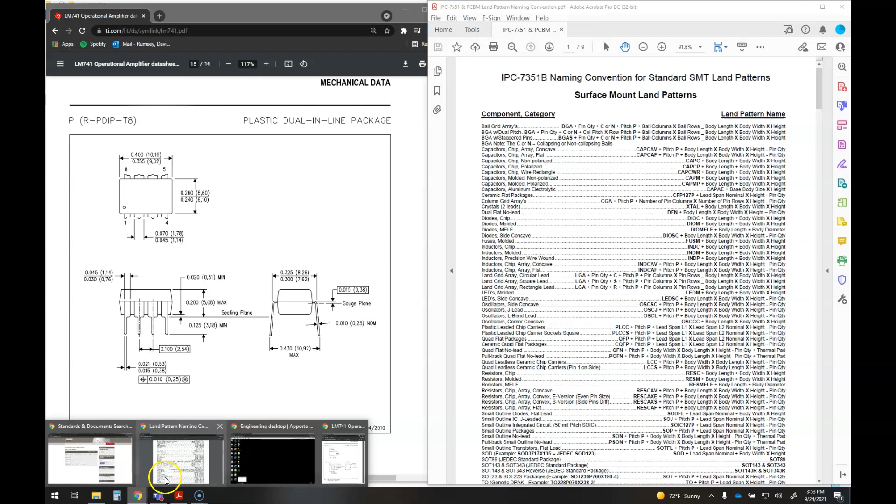Now what I'm going to do here for this particular one is I am actually going to use the Apporto system to show you how to be able to upload things and to set things up for doing this here. So first off, I have Apporto open. I went ahead and launched Allegro, which you can just do OrCAD and Allegro products, and then the PCB editor's right there. Now, I also have launched the pad stack editor, which is not the most obvious way to find it in Apporto. Let me close that here.

If you try and search through these, you're not going to find the pad stack editor searching through these. If you click the start menu and try and search, there's nothing there at all. But if you click that start menu and you just type in pad stack, you can see pad stack editor, and it says desktop app, which to me means it's somewhere on the desktop, but I have yet to find where the link is. If someone finds where that link is, more money to you. So let me move that to trash bin here. All right, but it's open.

Now the reason I point that out is that if I'm going to make a footprint on Apporto and I haven't saved my pad stacks to Apporto, I'm going to have a problem because I need to have both my pad stacks and my footprints there.

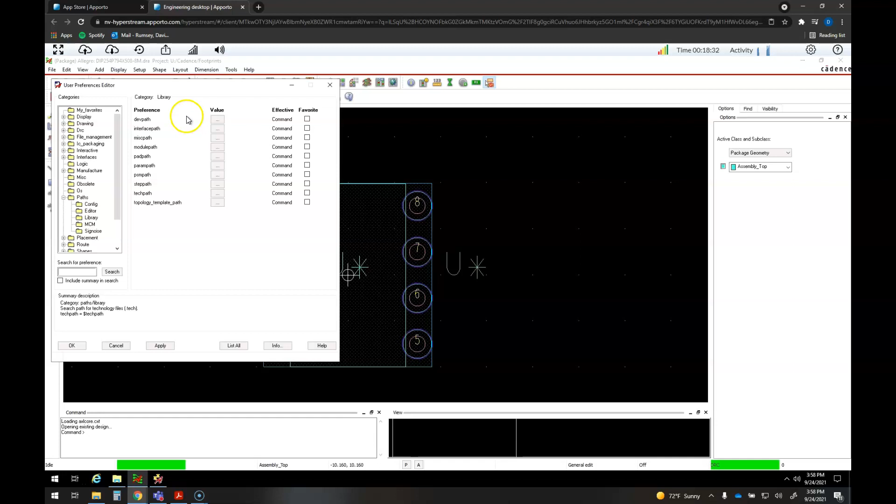The paths are where it contains file path names, or actually directory names on where files are stored. So if I go into library, there's a bunch of different ones here. We're not going to be concerned about all of them, but we are going to be concerned about the pad path to start with. That's where it points to as far as what directories to look for the pad stacks.

So if I hit those little three dots, it opens another little thing here and it says $padpath. What that means is it's looking for however you created the install of your Cadence software, it's looking in that created directory for all of the pad stacks.

So the pad stacks that we create aren't going to be shown there. And we definitely don't want to store our pad stacks there, because if we store those pad stacks there, then we could get them confused with the real ones versus the ones that are created by Cadence.

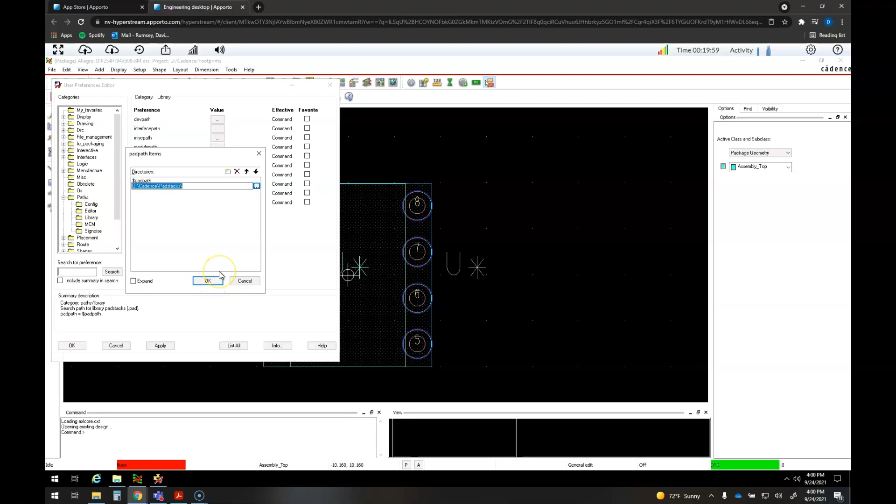So instead, we're going to do new, and I'm going to insert, and I'm going to go ahead and just navigate to U. And if you don't have it there, of course, you have to go to this PC, the U drive, and I created it under Cadence and pad stacks. So I'm going to add that directory in there now so that when I get ready to make my footprint, it's going to look in the directory on where I created my pad stacks.

So I'm going to click OK, click Apply. It's not necessary to click Apply, it's just a habit I get into, and then click OK. Now, let's go ahead and look at the pad stack directory. Currently, for Apporto, I don't have any pad stack stored here.

And the reason I don't have any pad stack stored here is because I didn't create any pad stacks on Apporto. I created them maybe on my computer at home, or my USB drive or something like that, my student account. So I don't have my pad stacks on Apporto. So either I need to recreate them or I need to upload them. Well, I'm going to upload the pad stacks, and so I'm going to go to File Upload.

Now, when you go to File Upload, you can upload more than one file at a time. And I'm already in my OneDrive Cadence pad stack folder. So I've got several pad stacks here, but the ones that I'm going to do are the 0.9 millimeter hole. Those are the ones that I need. So I'm only going to upload those. And now I got popped up that it successfully uploaded those files.

Now, the question is where? Well, by default, it uploads them to the desktop. Now, I don't like having them stored on the desktop, so I'm going to select both files, do Control X for cut, and then I'm going to paste those into my pad stack directory. Okay, so now they're in my pad stack directory. Great.

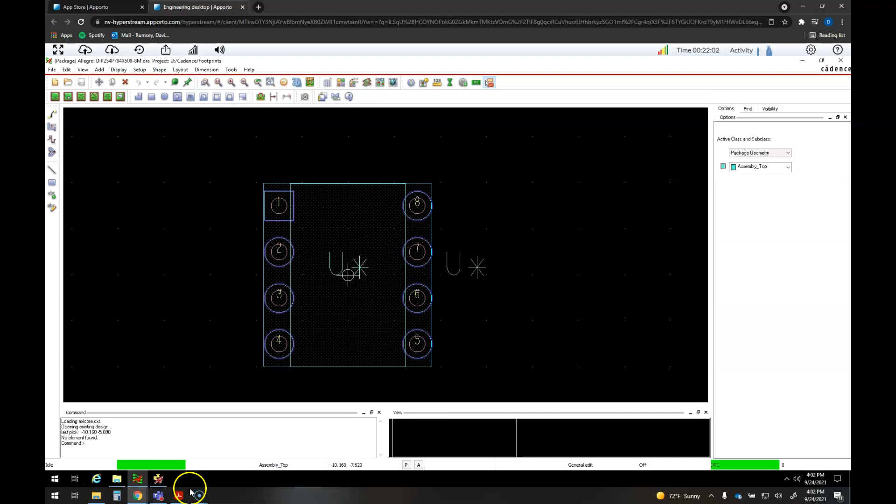Now we could say I'm ready to create my footprint. But at the beginning of this video, you may have noticed something that was open, which we're actually going to pause here for. Just like we have naming conventions for our pad stacks, which, as a side note, I found another nice PDF that summarizes all of the naming conventions for pad stacks, we also have naming conventions for the components, for the footprints.

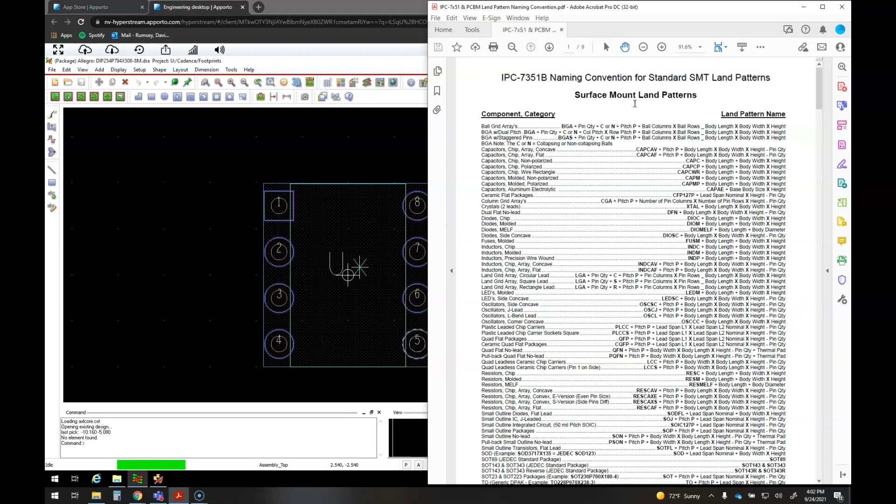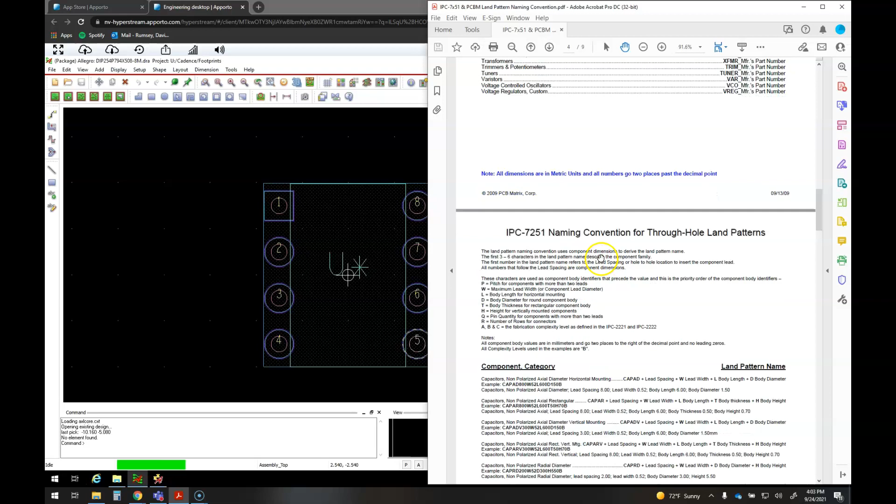Now, this document, which I will upload as well, has at the top surface mount components. Well, we're not doing surface mount components at this point, so we need to scroll down. And there's the suffix naming and everything, but I'm going to keep scrolling down. Oh, it says surface mount here for non-standard. Okay, well, I don't have that. Okay. IPC Standard for through-hole land patterns. And it gives some information.

The land pattern name convention uses component dimensions to derive the land pattern name. First 3 to 6 characters in the land pattern describe the component family. The first number in the name refers to the lead spacing or hole-to-hole spacing to insert the component. And that hole-to-hole spacing is referring to the width of those spacings, not the spacing like, for instance, in the picture that's referring to the dimension that would be the spacing between pin 4 and 5.

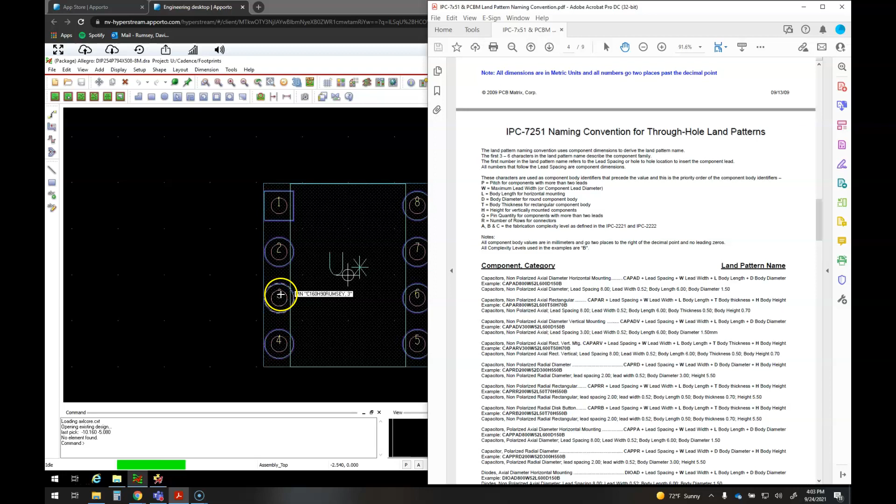Not the spacing between pin 3 and 4. The spacing between pin 3 and 4 is called the pitch. And then it's got some other things as far as what these things mean.

And so if I go here for dual inline packages, because that's what this is, we're going to have DIP plus lead span plus W, which is my lead width, plus P for pin pitch, plus L for body length, plus H for component height, and then plus Q for pin quantity.

And so if we want to make sure, again, we have here the lead span, W, lead width here, we can look for any kind of information. And it also says at the end, you'll notice in this example, there's a B at the end. So we end it with A, B, or C for the fabrication levels. And remember, by default, unless otherwise specified, we're using fabrication complexity level B.

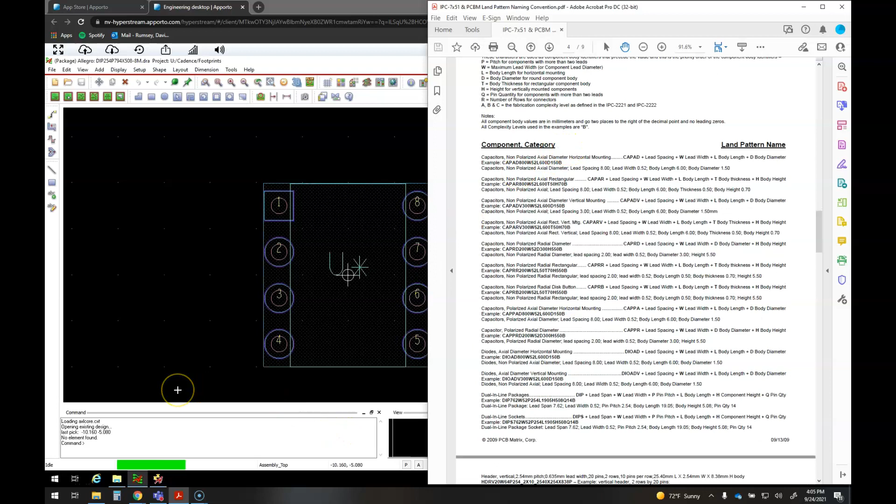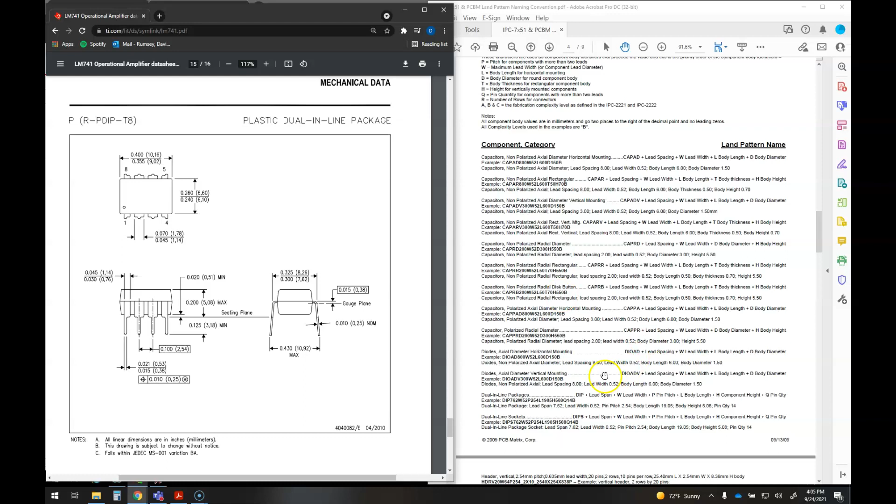All right, so let's figure out what the name should be here. Let's pull up this data sheet and go through it. I'm going to write it down on a piece of paper. So I know it's going to start out DIP. Let me zoom in a tiny bit.

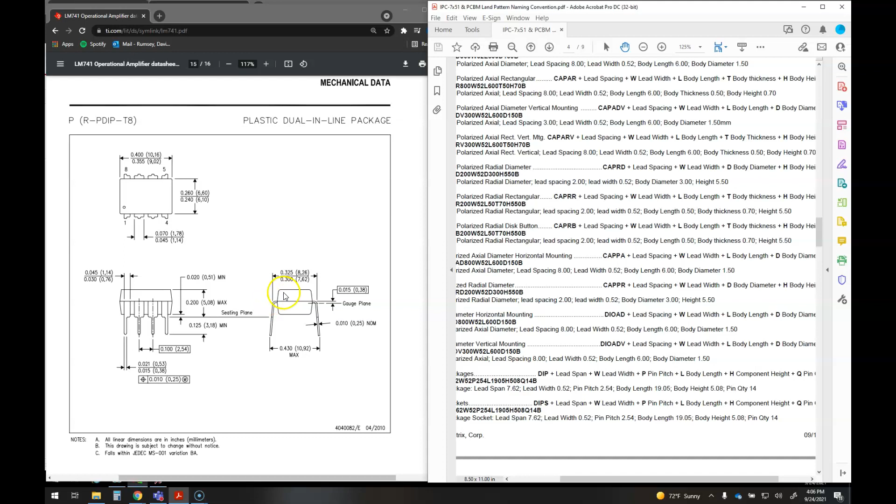So lead span, minimum and maximum here, and we could do a nominal. Now, a DIP is kind of a standard package. They did 7.62 in their example, so they are actually using the minimum number. Remember, we were going to use the maximum a lot of times. For this example, I'm going to use the nominal values for everything, just to show you how you can compute nominal values when you're given this.

So I have 8.26 millimeters as the maximum plus 7.62, which is the minimum, and I'm going to divide by 2, which is 7.94. So I'm going to have DIP, my lead span, which I'm going to write as 794 because it's 7.94, and then a W for my lead width.

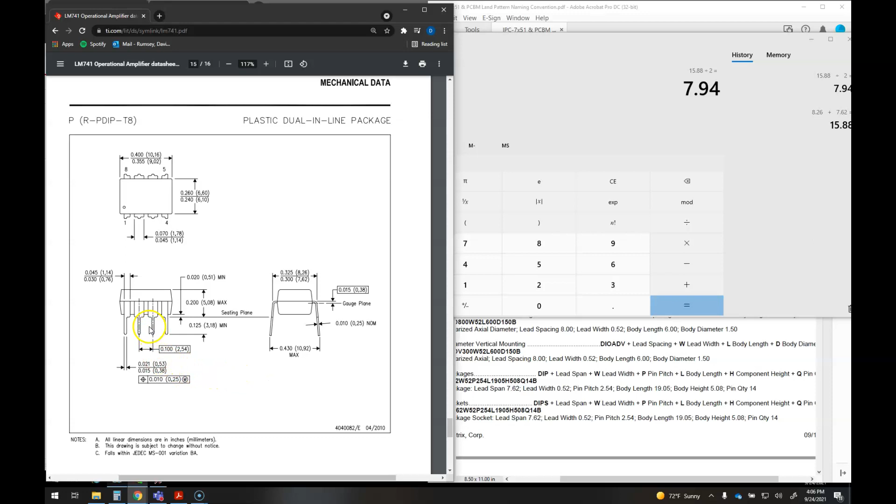Now they have it here as 0.52. Well, what is my lead width here? The maximum it says is 0.53, the minimum it says is 0.38. So in this case, they were essentially going for the maximum lead width, but we're going to go again for the nominal value. And you may say, why are there different values? Well, remember, some data sheets only report a single value as opposed to a range of values.

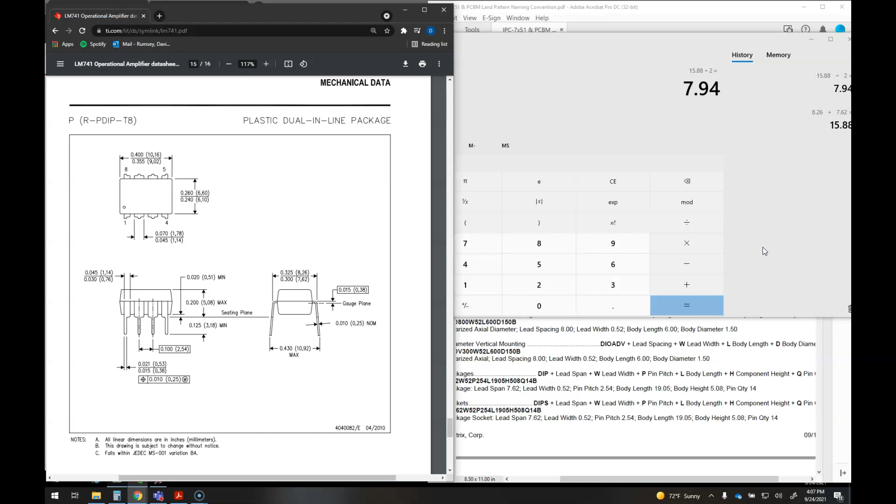Okay, so I'm going to do 0.53 plus 0.38 divided by 2. Whoops, order of operations. 0.53 plus 0.38, then divide that by 2, and I get 0.455. Now I'm going to round that to 0.46, so I would have W46.

And then pin pitch, that's this measurement right here, 2.54, that's correct. So that's going to be P254. Now I need body length, L. The body length of 19.05 is for a 14 pin. But if I look at my body length here using nominal values, 10.16 plus 9.02 divided by 2, I have 959 for my body length nominal value.

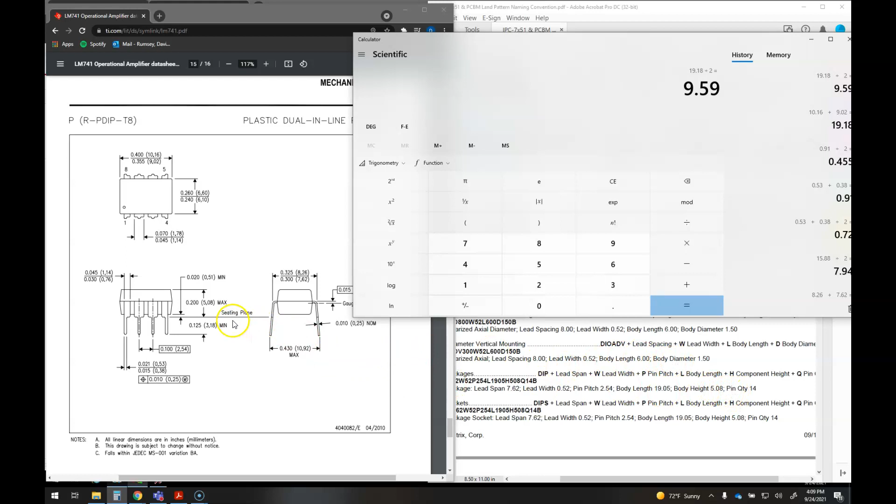And then, where am I here? I'm on my DIP. And then it's got component height, which is H. And here it says 5.08 for the component height. Now, I know exactly where that comes from. So component height here, and you see there's this little gap here. We want to include that gap.

So it's this distance here, because it's not going to sit literally with the bottom of the chip on the board. And that's because these pins are wider. They're wider on purpose so that there's no chance of any kind of damage happening, and also so there's a tiny bit of air gap as well.

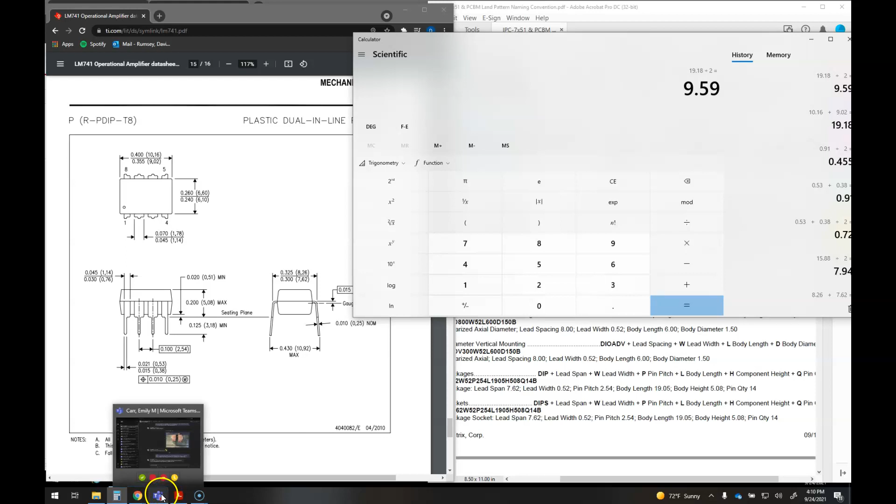So that is going to be 508 for my height, and then plus Q, the pin count, which is 8, and then my complexity level is A. All right. So using this name convention, going back to Apporto,

I'm going to now do File, New, Package Symbol Wizard, because we're actually going to just use the wizard this week. We're going to do DIP 794 W46. Wait a minute. I said 46. Yeah, 46, because it's 0.46. Okay, that is correct. Just wanted to make sure. I thought I got myself sidetracked for a second.

Pitch. Click back in here. Pitch 254. Length 959. H 508. Q 8A.

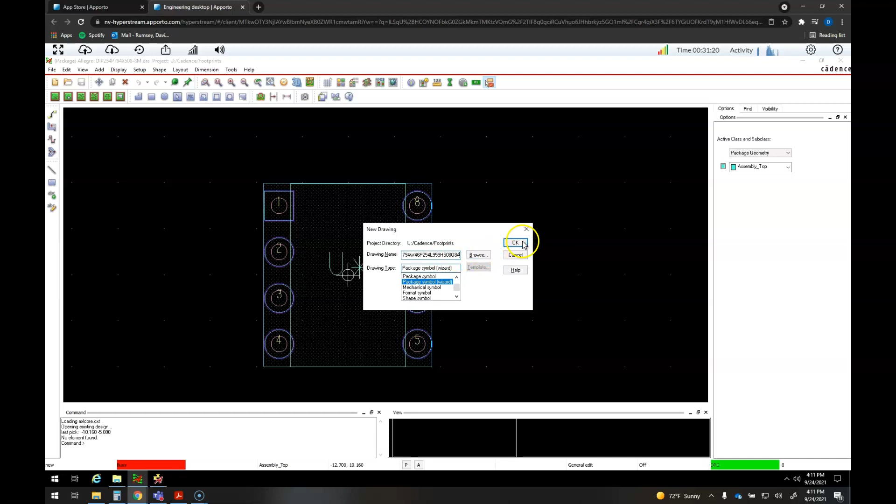And so I can see my long name here, and it's pretty long. And if you look at what Cadence does, Cadence actually does not follow this IPC naming convention. Now, before I go any further, let me emphasize that the IPC naming convention is not always followed. It really depends on the company that you use.

Some companies choose to not follow IPC naming convention because they want their parts named a particular way. For instance, they don't want to use just a generic footprint for a part. They actually will want an actual component manufacturer ID for that part.

There is a company in Fort Wayne that literally, for every type of resistor, and when I say every type, I'm talking about if it's a 1 kilo ohm resistor versus a 10 kilo ohm resistor, even if it's going to be, quote, the exact same footprint, they actually have two different footprint names, one for the 1 kilo ohm, one for the 10 kilo ohm, even though the dimensions within the footprint might all be the same.

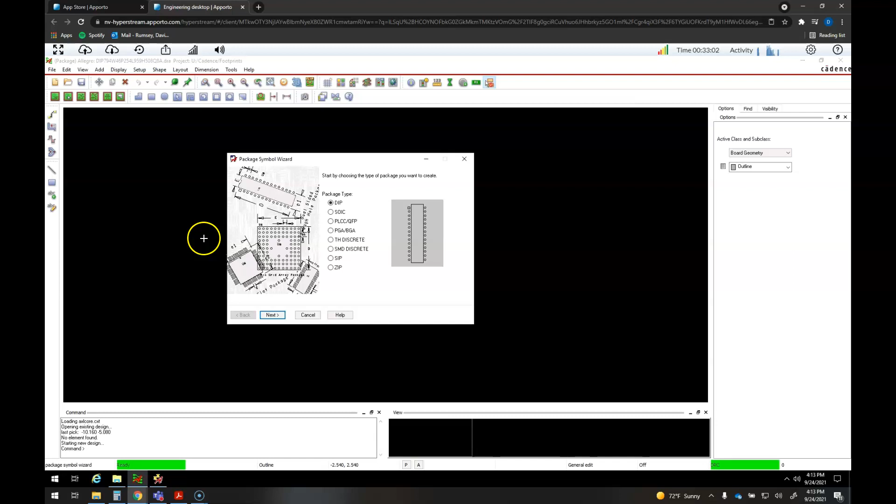And that's because they're getting to a specific level of actual manufacturer's parts. So there is this IPC standard, but not every company is going to follow this naming convention. But since we're teaching IPC standards in this course, we're going to follow the naming conventions.

So then we hit next, and we always need to load a custom template in. It's going to always give us this warning. I'm going to hit yes. Next. Now remember, we are going to do everything in millimeters. So I'll go ahead and put the decimal points up to 4 for no reason.

Now this reference designator, by default, when you're doing a chip, it's going to do a U here. It does not have to be a U. If you do a drop down, there's other ones. Now you can imagine R and C are for resistor and capacitor. J is usually for jumpers or connectors, things of that nature.

But just because those are the only choices does not mean that's all we have to do. I could do a T instead, even though that's not in the drop down menu. But we are going to do U because that is standard for chips, for integrated circuits.

Now this little asterisk afterwards is really to append on from the circuit diagram if it's like U1 versus U2 versus U3. So if there's a number that's following it, like often resistors, you'll have R1, R2, R3, and so on. It will append that reference designator information from the label in your circuit diagrams into that asterisk field. And so I'm going to go to next.

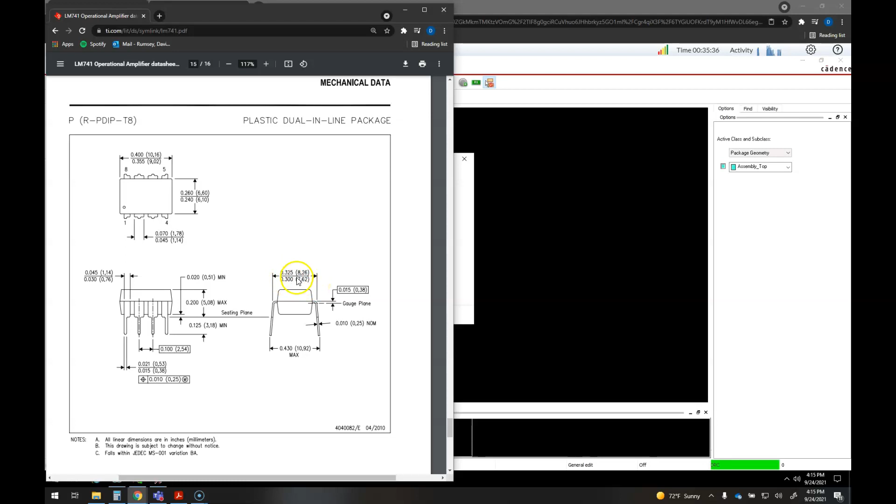minimum here. And we went with the average or nominal value is what we said. Now again, the 7.62 might be considered a nominal value on some data sheets, but we went with the average of the max and min. So that was 7.94 millimeters.

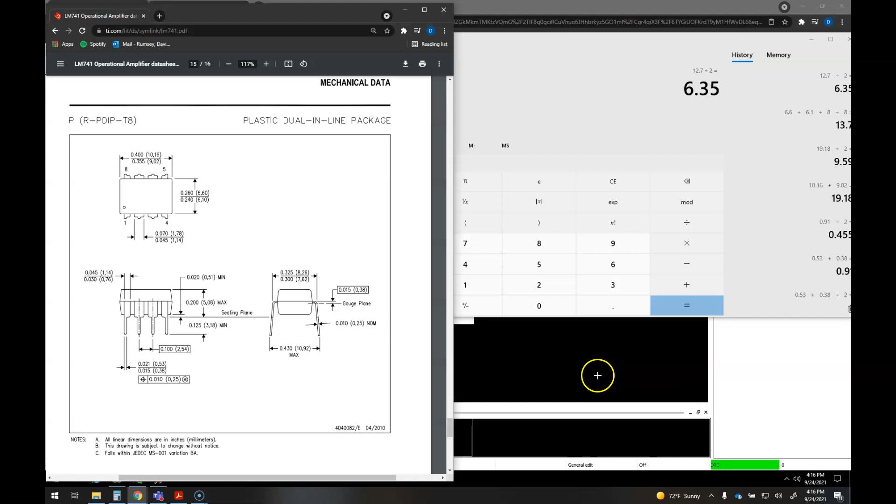And then the package width, well, that's nowhere in our name. The package width here, though, again, if we're going to do our averaging like we've been doing, we have 6.6 plus 6.1, which is 12.7, divided by 2. So we get 6.35, which is actually what's right there. So that's why I said, again, using kind of the nominal value as the average.

And then we're going to do the same for the length. So I'm bringing up my calculator. I've got 10.16 plus 9.02 divided by 2, 9.59.

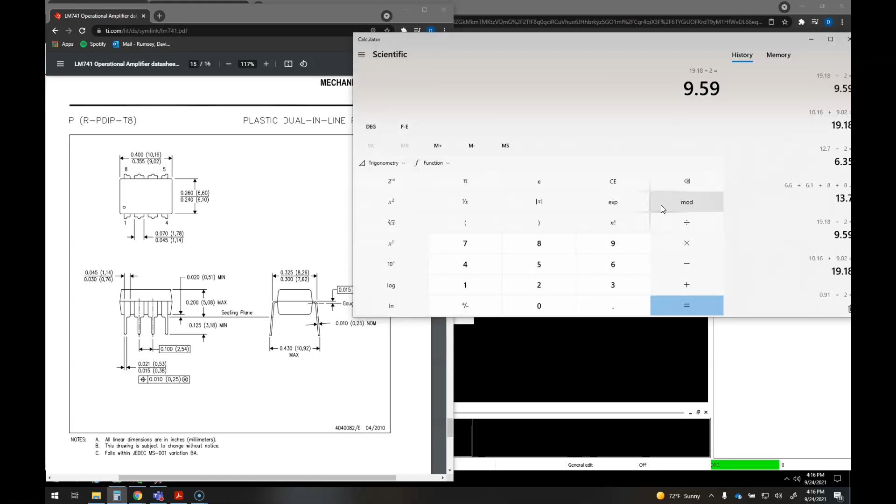And the default pins here. Now, this is all of the pins from Cadence, all the pad stacks. And so I've got to find mine in here. Well, I started one with a C. So if I scroll down, oh wait, I went too far. And if I go back up, oh wait, here it is. And you can see these don't necessarily follow the naming conventions that we've been looking at.

And I had ended it with last names because that's what we had done in our previous week's homework, even though that's not an official part of the naming convention. Now, I also made a different one for pin 1 because I made one that had a square copper pad.

Now, instead of going down through that, you can use this wildcard idea, this asterisk, to your advantage. I know a square pin is going to start with an S, and so if I do S star and then hit enter, it's only going to list the pad stacks that start with an S. And there's mine right at the top, S160H90 Rumsey. And then I'm going to hit next, next, and then finish. Well, before I finish, I did the pad stacks here.

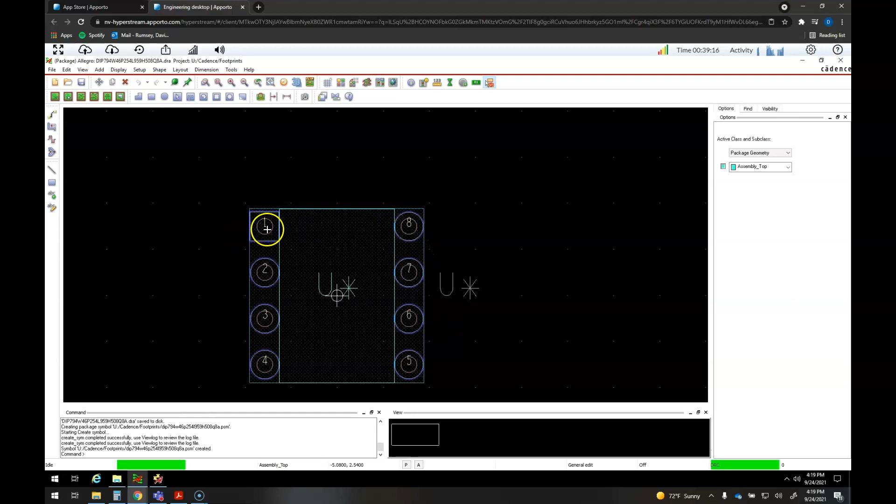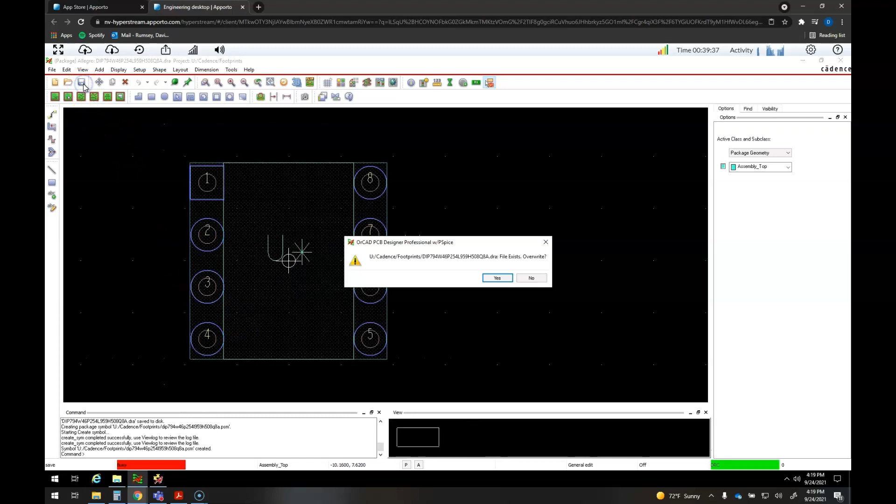And then it's also got all of my pins, the first one being a square, as we said, and you can see when we zoom in, here's the drill hole, here's the copper pad, and then the purple is the solder mask. So we have our footprint created. So just save that. Anytime you save it, it's going to ask if you want to overwrite it.

Now if I go to my footprint directory, which is where I saved it, we will see my nice long file name here. So there's this DRA file, and then there's this PSM file. Both of these files need to be turned in when you turn in your assignment. And so if I was done, I could actually open an internet browser here, log into Blackboard, and upload the files that way.

But let's say I need to take a break or something. I could leave them here, but let's suppose you want them on your local computer or your laptop. So let's say we want to download these. Well, the easiest way to download them is to copy both of them. So I'm going to select both, and then I'm going to do a Control-C to copy, throw them up on the desktop,

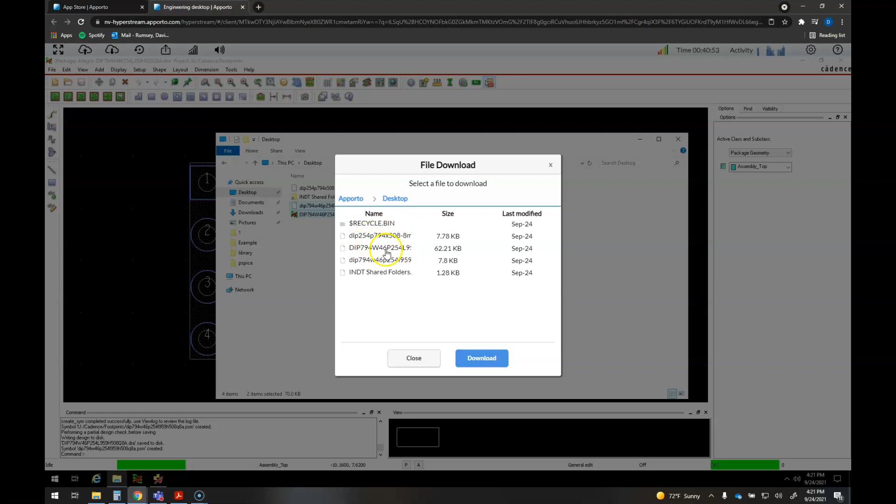and then use this file download, and then it will give me on the desktop here what files I can download. And so there's this one, and then there's this one, and then they would just download onto your computer and save in whatever directory you have as your save directory for the downloads. Now, just so you know, this symbol looks a little bit different only because I also have version 17.4 installed on my computer.

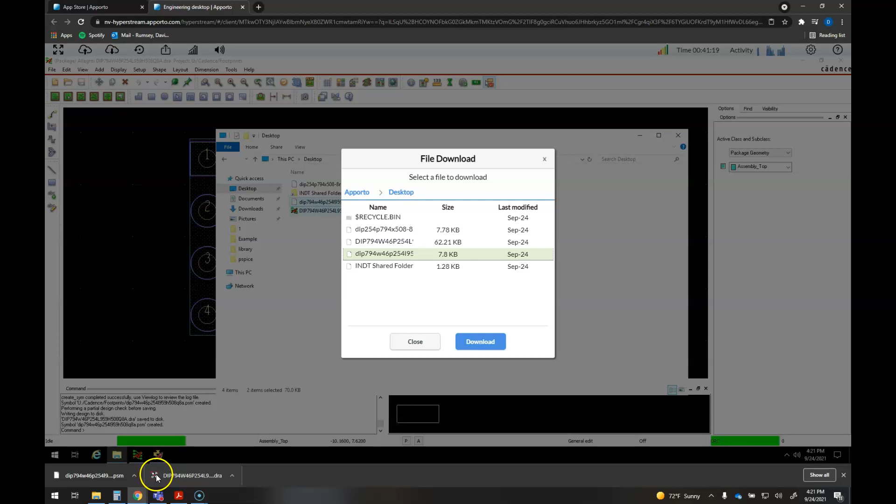So that's all we need to do to make a pad stack using the symbol wizard. As you can see, it almost took us longer just to figure out the name of the component than it did to actually create the component.

Let me see, I think there was one more thing I was going to tell you or show you. Let me pause. I know what I was going to show you. I was going to show you a kind of slick way you can get around looking through all those pad stacks. So if we go to the file and we'll just start a new package, I'm just going to go without using any kind of naming convention, just call it test and do a package symbol wizard.

Actually, I'm not going to do that yet. I forgot I need to change the setting. Setup, user preferences. I'm going to go back to this pad path. Now we have this $ pad path and then this C cadence pad stacks. I don't have to have that there. In fact, often companies will not have this path there because they don't care about the Cadence predefined pad stacks. They only want to use ones that they themselves have created. So I'm just going to actually delete that.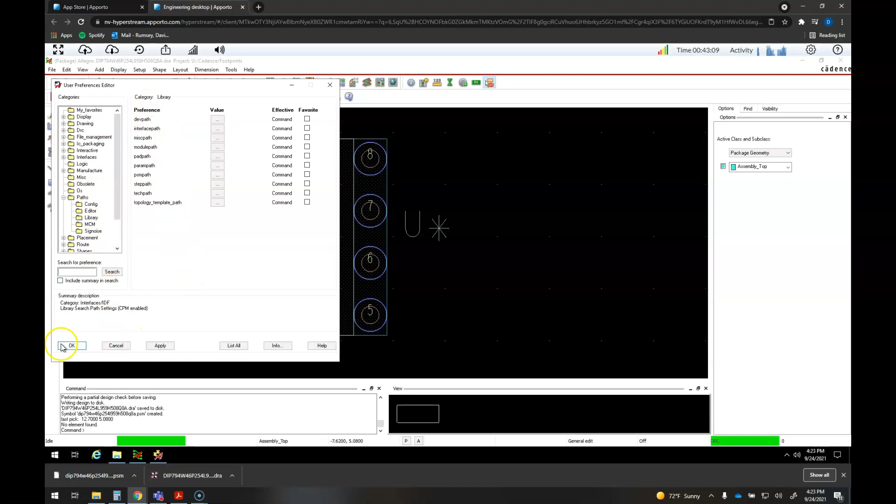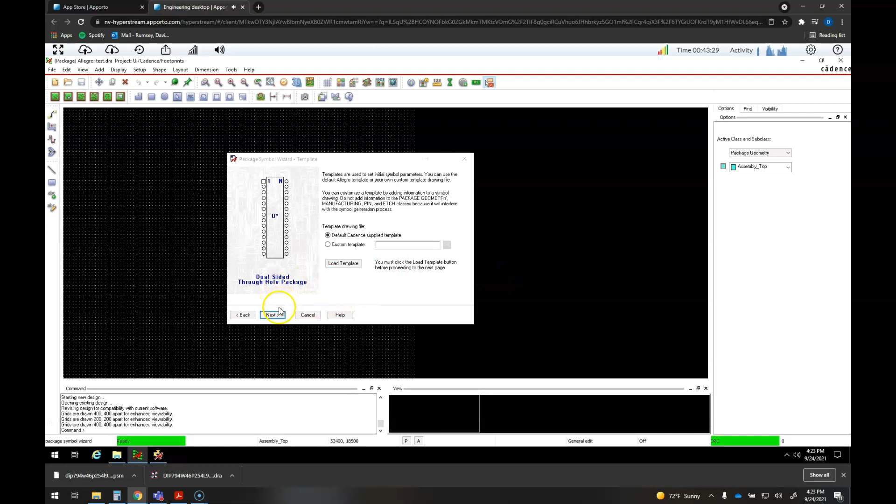And then I am going to select OK. And then I am going to go ahead and do a new part. Package symbol. And again, I'll just call it a test. It's just going to be dual inline package, load custom template. I'm not even going to worry about the fact that it's in mils. I'm just going to keep hitting the next button until I get to the pad stacks.

But now we see I only have 2 pad stacks to select from because it's only looking in that directory, which is only containing the pad stacks that I've created. So I will actually do this sometimes when I'm running it on my home computer, because I don't want to use any of the pad stacks that Cadence has created. I only want to use the ones that I've created. And so that is kind of a slick way to make it so that you only see the ones that you've created, which makes it easier to select the one you want to use. Obviously, it's not required, but it is a nice little feature.

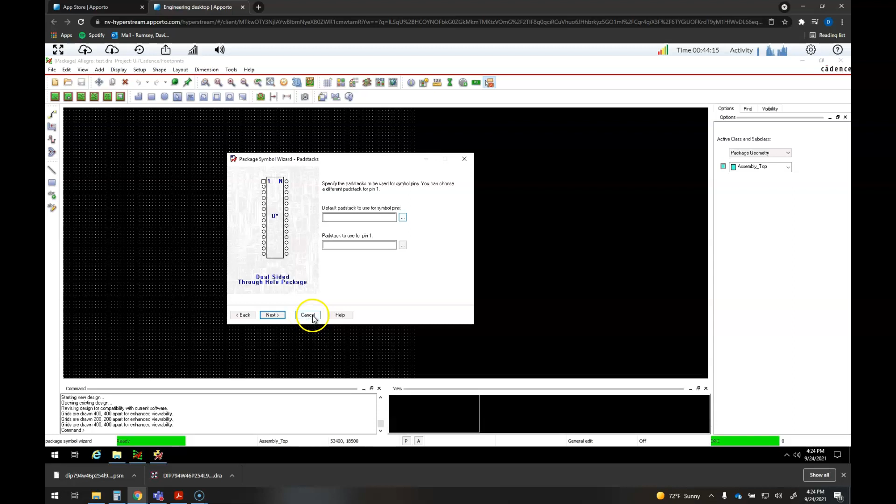The other thing I want to show you, and I'll just do this by hitting back here, is for your homework, one of your things you will do is probably going to use what's called an SOIC pattern, even though the actual package is what's called an SOT package, which stands for Small Outline Transistor. Now, you might say, well, how can I use the same one? And the reason is because it looks the same. It's just got smaller dimensions. So as long as the device looks like this, even if the package is not an SOIC, we could use this wizard for the SOIC.

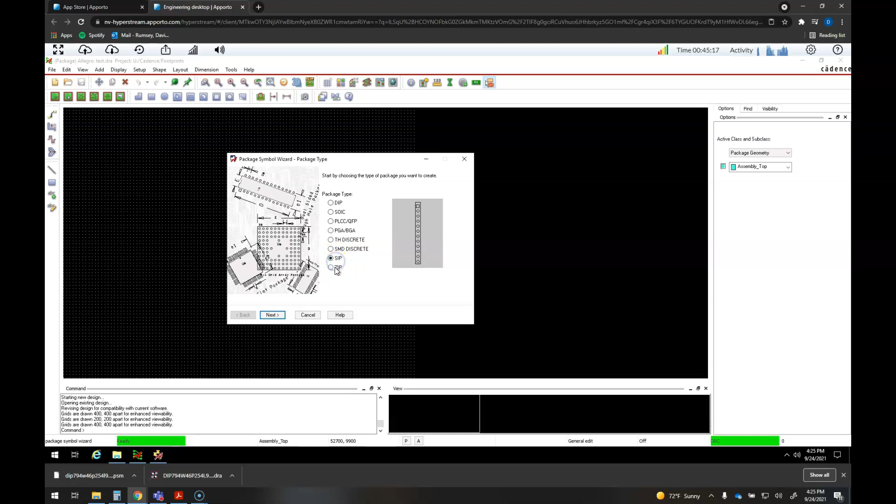The other one is that you will be doing one that, while it's technically not a ZIP package, will actually work very well. And so let me actually show you what you're going to be doing in your homework here. I think it's the TDA one. Yeah. So you can see that there's different pins here, and they're staggered. They're not dual inline. They're kind of a staggered pattern. I guess the reason they call it a ZIP is maybe zigzag, because you could kind of draw a zigzag going between these pins here.

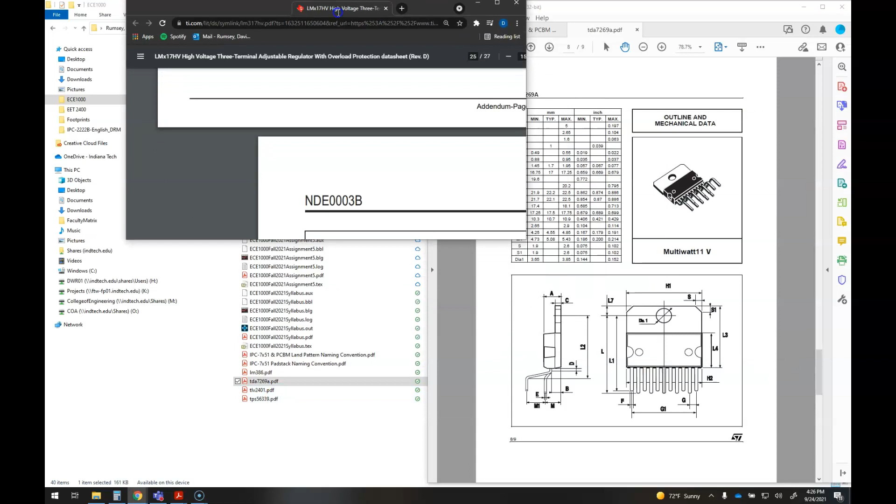And so while it doesn't look like this shape might be correct, you can absolutely still use that. The thing you'll have to be a little bit creative on is the dimensions of the actual component. So try your best on that. And then you will have one component where you're going to have to create a footprint where I am not giving you the pad stack for it. And that's going to be this particular device, which is for an LM317.

Now, I will talk to you about that, especially with how we will name that particular component. That component is what is called a transistor outline, and it's got a JEDEC standard package. So the naming convention is TO-the JEDEC number. I will put this in the homework assignment as well, but the JEDEC number is 220. And JEDEC is actually another organization out there for standards and naming conventions and things of that nature. So IPC is not the only one. JEDEC is also another one, and there's others as well.